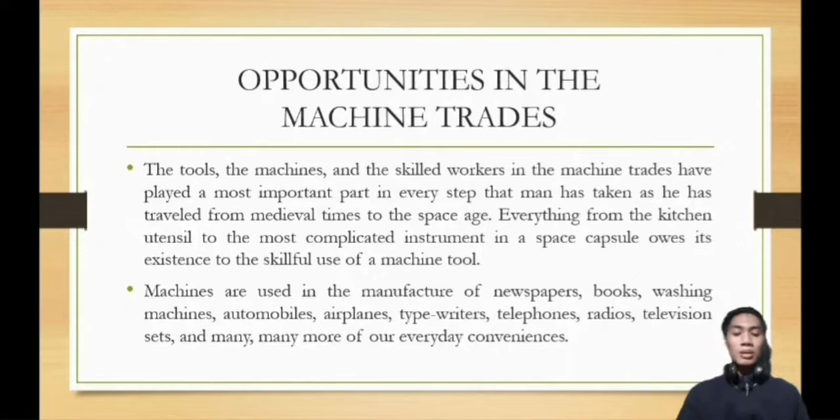Machines are used in the manufacture of newspapers, books, washing machines, automobiles, airplanes, typewriters, telephones, radios, television sets, and many more of our everyday conveniences.

Types of shops. A job shop is a machine shop that is equipped with machines and workers that can undertake a wide range of machining jobs of limited quantity and usually of a very specialized nature. A job shop may be called upon to develop the prototype of an idea thought up by a design engineer or an inventor. It may be employed to make a single piece or a dozen or 100 pieces in a standard or a special shape.

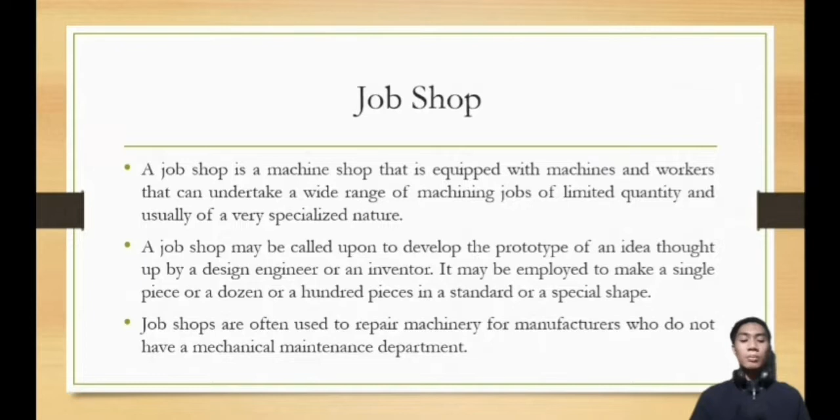Job shops are often used to repair machinery for manufacturers who do not have a mechanical maintenance department.

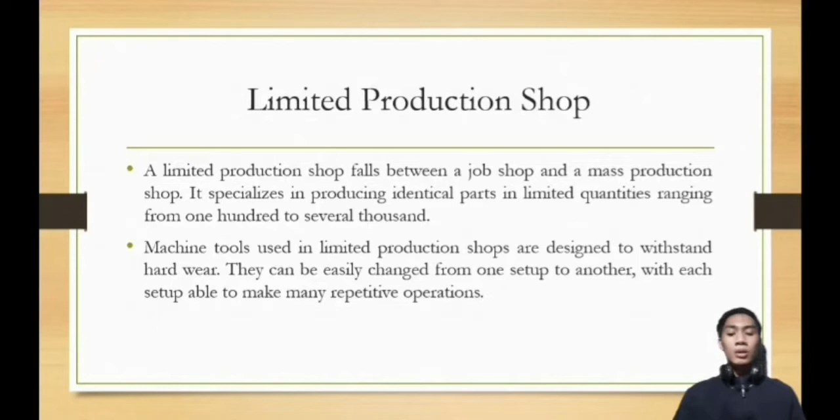Limited production shop. A limited production shop falls between a job shop and a mass production shop. It specializes in producing identical parts in limited quantities ranging from 100 to several thousand. Machine tools used in limited production shops are designed to withstand hard wear. They can be easily changed from one setup to another, with each setup able to make many repetitive operations.

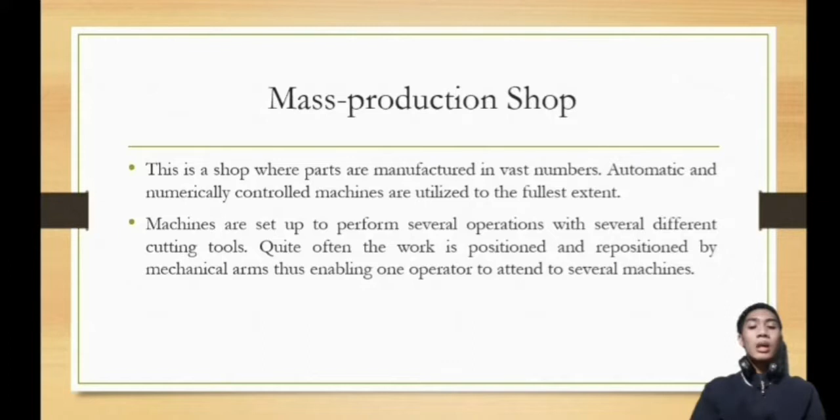Mass production shop. This is a shop where parts are manufactured in vast numbers. Automatic and numerically controlled machines are utilized to the fullest extent. Machines are set up to perform several operations with several different cutting tools. Quite often, the work is positioned and repositioned by mechanical arms, thus enabling one operator to attend to several machines.

Job description. The apprentice. Apprenticeship is a form of practical on-the-job training given under the direction of skilled mechanics or technicians. A person becomes an apprentice when he agrees to serve a prescribed length of time in order to learn the job or trade offered by an employer. An apprentice can specialize in any one of several specializations of the machinist trade.

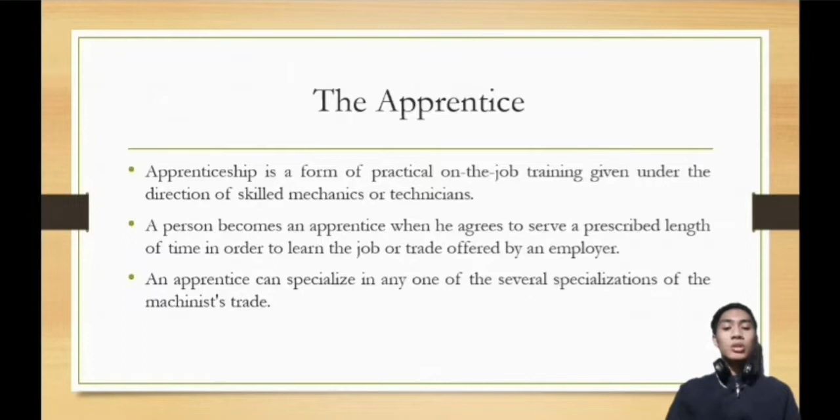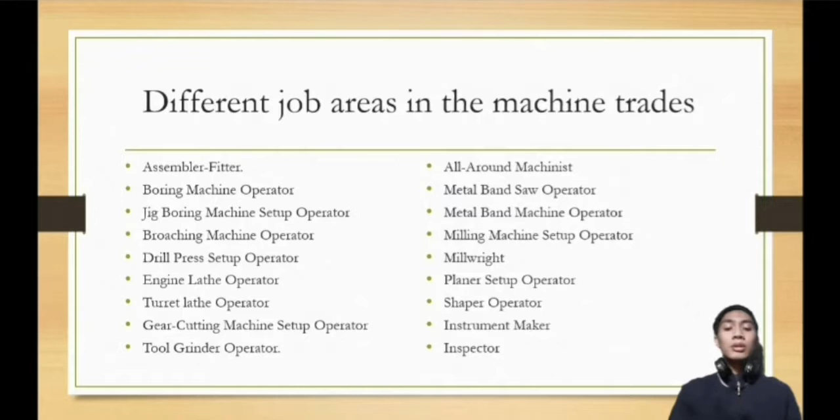Different job areas in the machine trades include: assembler-fitter, boring machine operator, jig boring machine setup operator, broaching machine operator, drill press setup operator, engine lathe operator, turret lathe operator, gear cutting machine setup operator, tool grinder operator, all-around machinist, metal band saw operator, milling machine setup operator, millwright, planer setup operator, shaper operator, instrument maker, and inspector.

Engineering positions.

Industrial engineering technician studies and records time, motion, methods, and speed involved in performance of maintenance, production, clerical, and other work operations to establish standard production rates and to improve efficiency. Prepares charts, graphs, and diagrams to illustrate workflow, routing, floor layouts, material handling, and machine utilization.

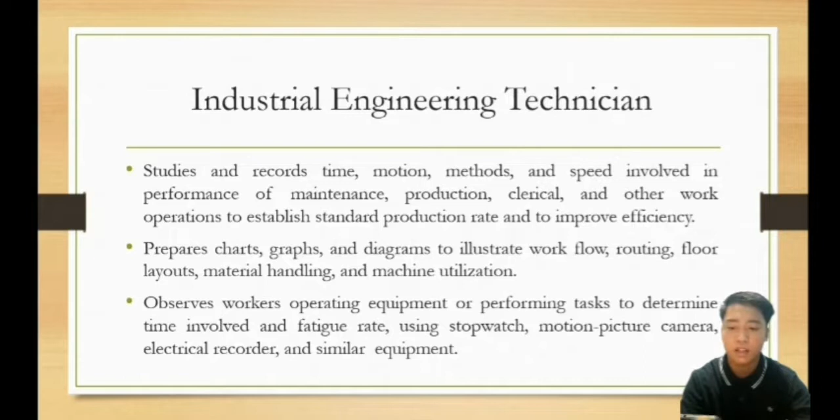Observes workers operating equipment or performing tasks to determine time involved and fatigue rate, using stopwatch, motion picture camera, electrical recorder, and similar equipment.

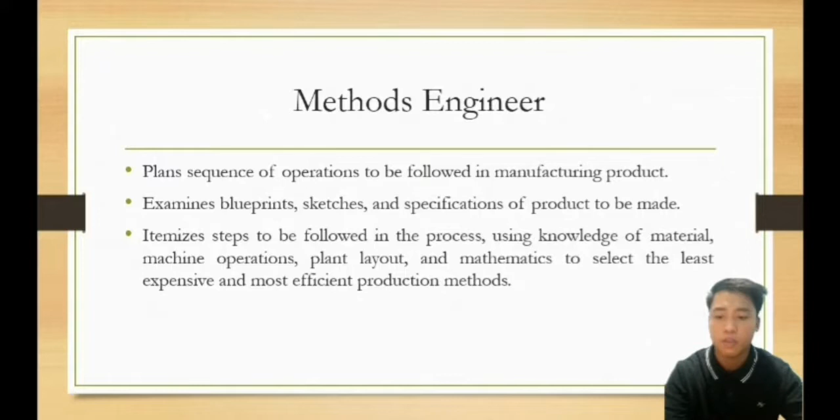Methods engineer. Plans sequence of operations to be followed in manufacturing a product. Examines blueprints, sketches, and specifications of products to be made. Itemizes steps to be followed in the process, using knowledge of material, machine operations, plant layout, and mathematics to select the least expensive and most efficient production methods.

Time study engineer. Develops work measurement procedures and directs time and motion studies to promote efficient and economical utilization of personnel and facilities. Analyzes work-study data and equipment specifications to establish time and production standards. Applies mathematical analysis to determine validity and reliability of sampling and work study statistics.

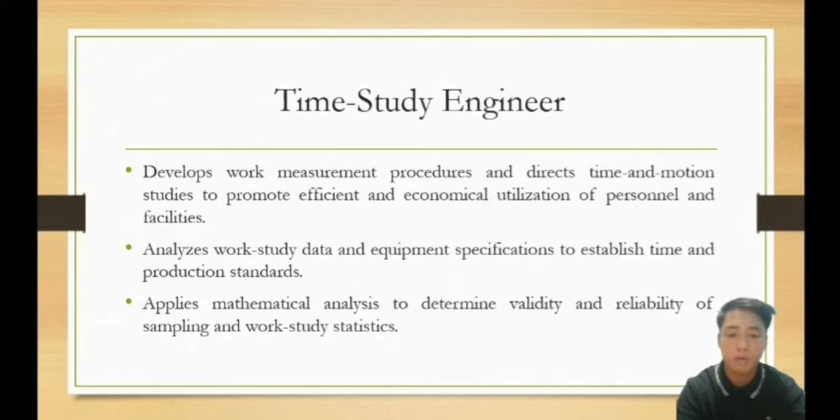Quality control engineer. Performs and oversees activities concerned with development, application, and maintenance of quality standards for processing materials into partially finished or finished products. Devises sampling procedures, designs forms for recording, evaluating, and reporting quality and reliability data, and writes instructions on use of forms. Establishes programs to evaluate precision and accuracy of production and processing equipment and testing, measurement, and analytical facilities.

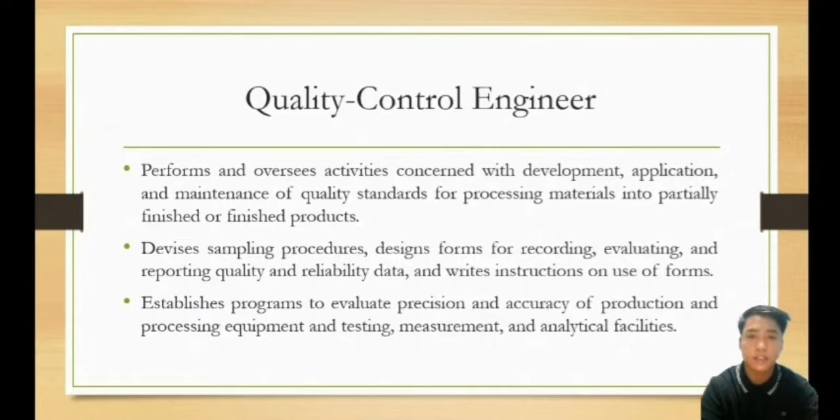Foreman. Supervises and coordinates activities of workers engaged in one or more occupations. Interprets specifications, blueprints, and job orders to workers and assigns duties. Analyzes and resolves work problems, or assists workers in resolving work problems.

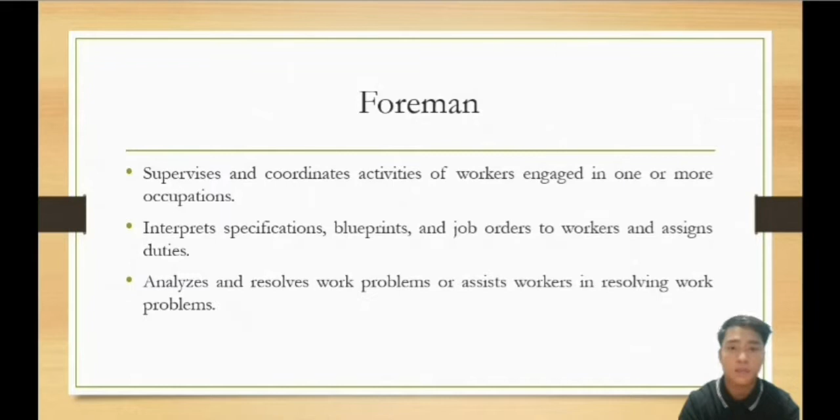Safety in the machine shop. In this topic, I'll show you how to prevent accidents and how to take care of the machines that you'll be using, what proper dress to wear, and what precautions to take for every machine. In general shop safety, the operator must remove his or her necktie, wristwatch, and jewelry.

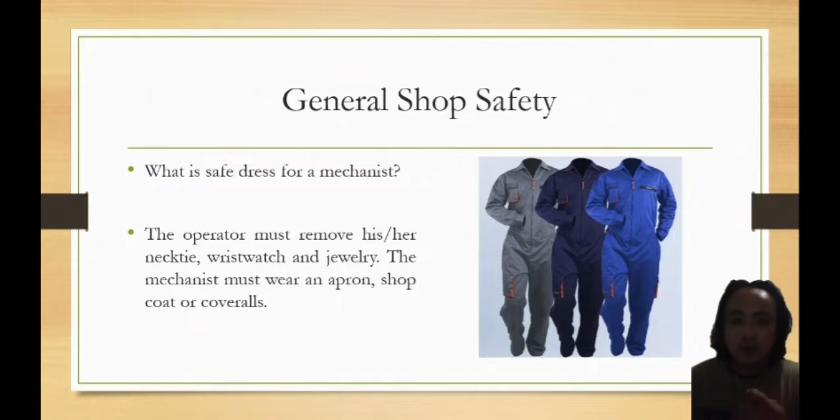The machinist must wear an apron, shop coat, or coveralls. When should gloves be worn in a machine shop, and why would goggles or safety glasses be worn by everybody working in the machine shop? Gloves should be worn when the worker is moving sheet metal or large pieces of stock, especially when stock edges are sharp or ragged, because gloves protect your hands from metal chips that cause wounds on the hands.

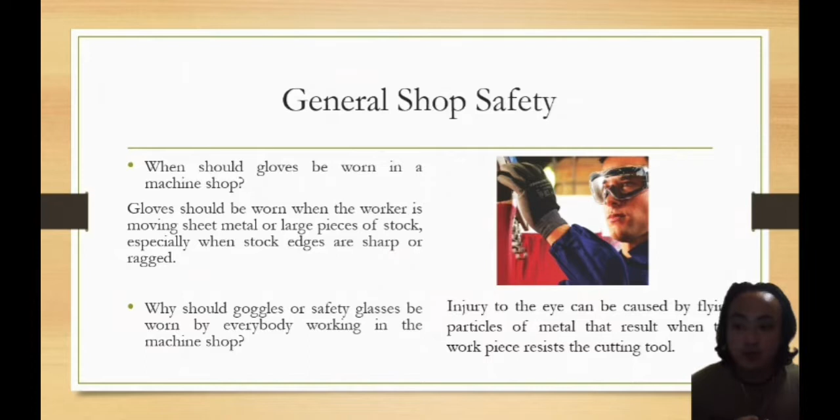Everybody must wear goggles or safety glasses because it prevents injury to the eye caused by flying particles of metal that result when the work piece resists the cutting tools.

What is the safe way to lift a heavy object? Don't attempt to lift a job or machine attachment by yourself if it is too heavy or too awkward for one person to handle. Before lifting, be sure that you have a firm footing. Keep your feet about 8 to 12 inches apart and get a good balance, then bend your hips and knees to squat down to your load. Keep it close to your body and straighten your legs to lift.

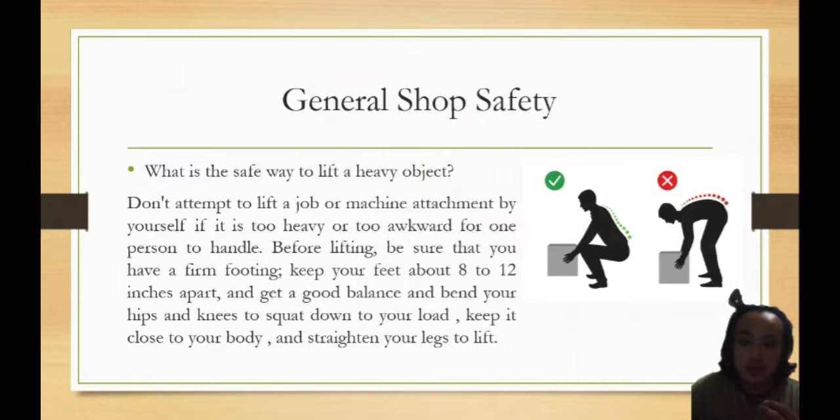What must be done before beginning repairs on a machine? Remove the fuse that controls the flow of electrical power to the motor of the machine.

Why is it dangerous to run a machine from which the guards have been removed? Guards removed to repair a machine or to enable the mechanist to make operative changes should be replaced before the power is turned on. Operating an unguarded machine is hazardous not only to the operator but also to other workers who may come in contact with moving gears and other machine parts.

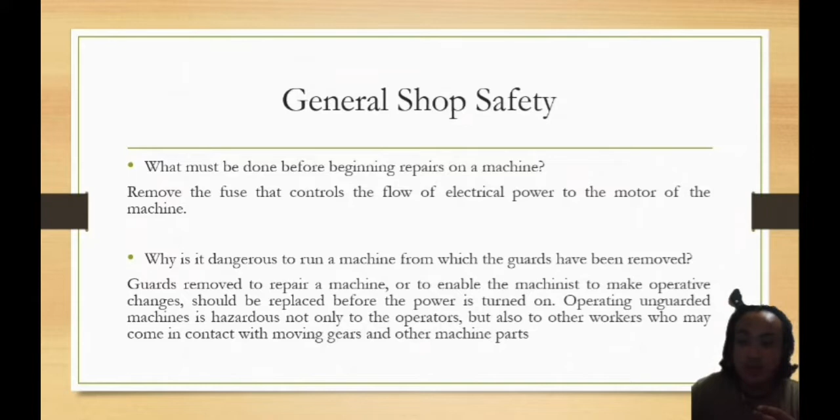Now let's proceed on safety on the bench. What causes the greatest number of accidents to bench workers? Most accidents to bench workers are caused by thoughtless use of tools, which includes using a tool incorrectly or carelessly. Many accidents result from using a tool to do something for which it was not intended.

For example, some people use a flat screwdriver as a chisel. Many painful accidents are caused by pointed or sharp-edged tools.

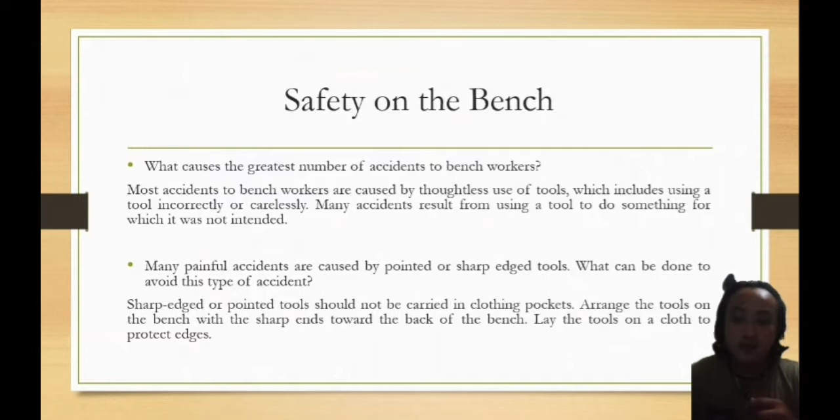What can be done to avoid this type of accident? Sharp-edged or pointed tools should not be carried in clothing pockets. Arrange the tools on the bench with the sharp ends toward the back of the bench. Lay the tools on a cloth to protect the edges.

Many workers are hurt because of the misuse of hammers. What rules, if followed, will remove the cause of these accidents? First, always check the fit of the handle in the hammer head. Make sure that the wedge is in place and tight.

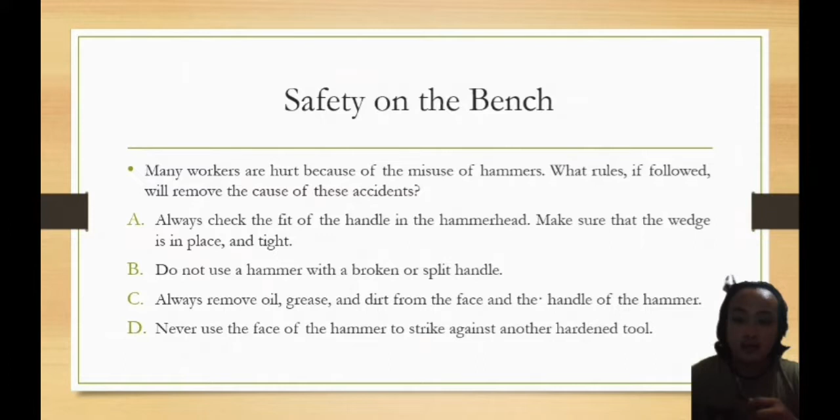Do not use a hammer with a broken or split handle. Always remove oil, grease, and dirt from the face and the handle of the hammer. Never use the face of the hammer to strike against another hardened tool.

Now let's proceed on hacksaw safety. Why is it unsafe to use a dull hacksaw blade? If a saw does not cut efficiently, it seems practical to apply more pressure to cut, increasing the chance that the blade will split with the great force behind it. Also, the more pressure with poor cutting action will cause the blade to break.

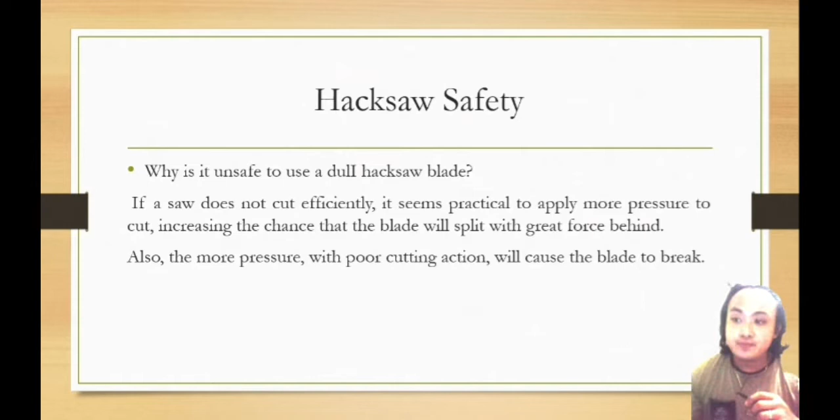What rules should be observed for the practice of safety when hacksawing? First, grip the work in the vise so that the saw cut will be near the jaws. Apply pressure only on the forward stroke. Start the saw cut with a light, even forward stroke, holding the saw frame at an angle. When the cut is established, bring the frame level and saw the full width of the job. Take the longest stroke possible, but do not permit the blade supporting pins to touch the job.

Lastly, use a blade having the proper number of teeth per inch to suit the job. Fine pitch for thin metal, coarse pitch for thick pieces.

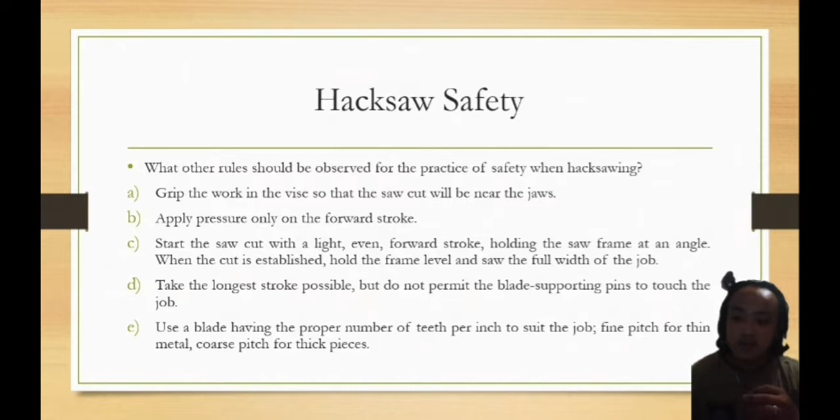Now let's proceed on drill press safety. The most common cause of accidents on a drill press is caused by the work not being securely fastened. The job must be securely held, clamped, or bolted down, whatever size hole is being drilled.

How should work be held for drilling? Work should be held in a vise or clamped to the table.

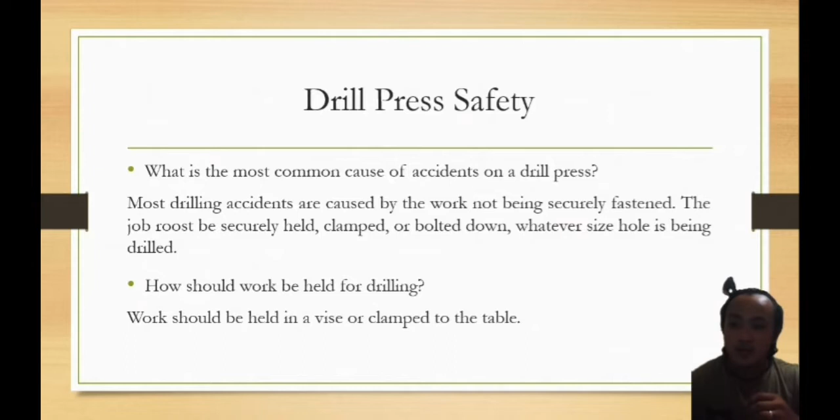Why should the drill press operator keep his hair cut short or wear a cap? To prevent stray strands of hair from being caught in the fast-moving belts or the revolving drill spindle.

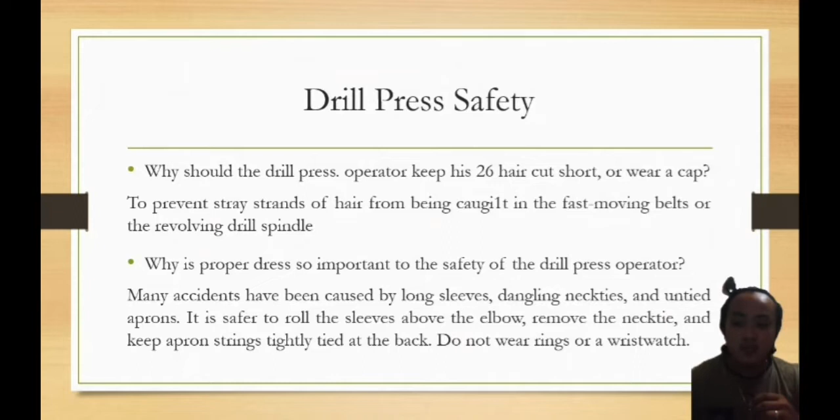Why is proper dress so important to the safety of the drill press operator? Many accidents have been caused by long sleeves, dangling neckties, and untied aprons. It is safer to roll the sleeves above the elbow, remove the necktie, and keep apron strings tightly tied at the back. Do not wear rings or a wristwatch.

What are the most important rules for safe operation of the drill press? First, think about what you are doing, keep your mind on the job. Second, dress safely: remove rings, watches, identification bracelet, and neckties, and roll up your sleeves. Then fasten the job or vise securely to the table.

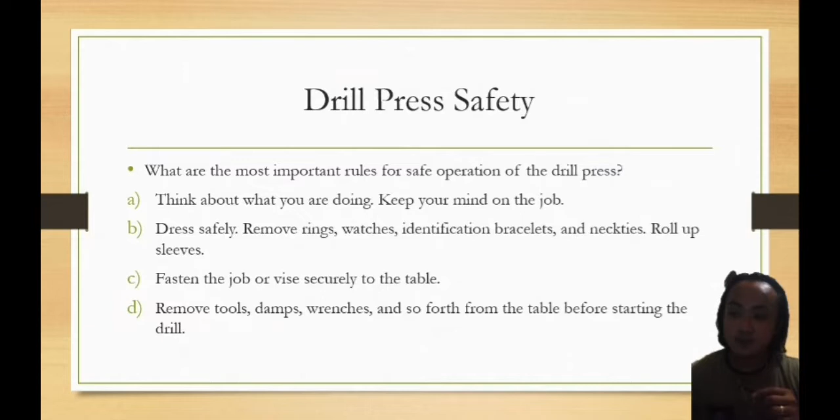Remove tools, clamps, wrenches, and so forth from the table before starting the drill. Remove the drill drift from the spindle or the chuck key from the drill chuck immediately after use. When the drill becomes dull, resharpen it or replace it, then grind the drill correctly for the metal it is required to cut. As the drill breaks through the work, relieve down feed pressure, then stop the machine before measuring or adjusting the job.

Lastly, stop the machine before using a brush to remove chips and excess coolant.

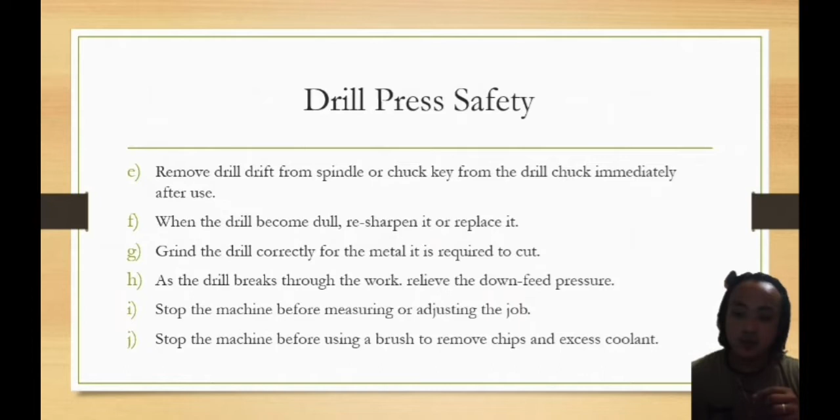Next is safety on the lathe.

Why should the lathe be stopped before making adjustments to the tool holder? When the tool post screw is loosened, the wrench may swing into the revolving chuck jaw. The sharp blow would break the tool post screw, causing it to fly and endangering the operator and nearby workers.

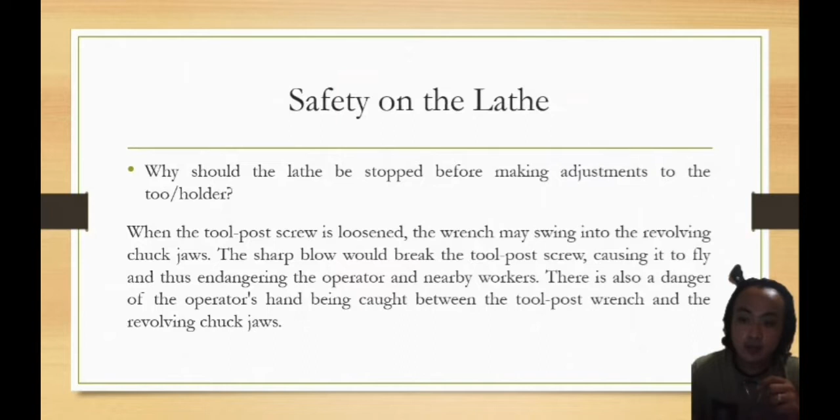How can wearing jewelry create a safety hazard for the lathe operator? Loose-fitting jewelry, such as an identification bracelet, or an article raised above the skin surface, such as a ring, can easily be caught on a revolving machine part, which would drag a hand or arm into the moving machinery, causing serious injury.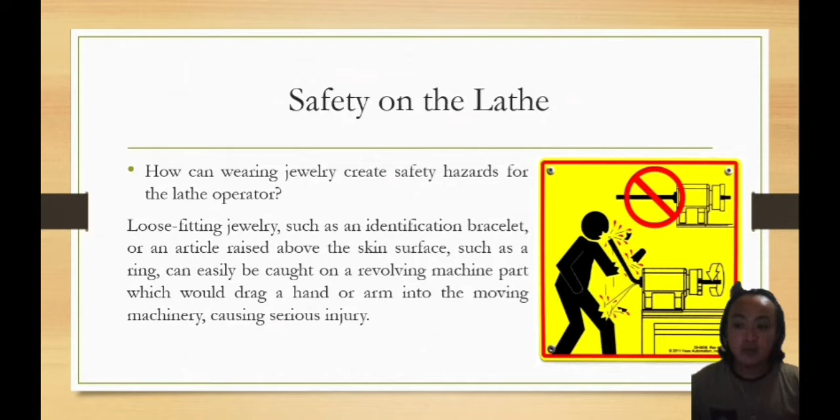Here are some safety precautions on using the lathe machine. Do not operate the lathe until you understand the controls. Never operate the machine if safety guards are removed.

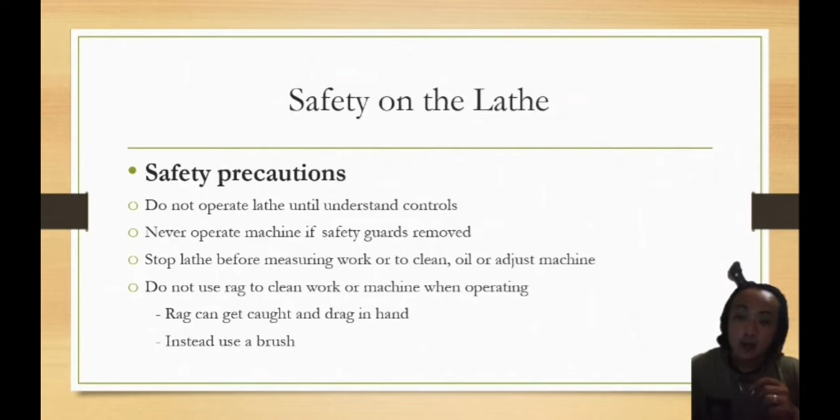Stop the lathe before measuring work, or to clean, oil, or adjust the machine. Do not use a rag to clean work or the machine when operating, because the rag can get caught and drag in the hand.

Instead, use a brush. Now let's proceed to milling safety. How should milling cutters be handled? Milling cutters have sharp cutting edges and should be handled carefully. They should be held in a piece of cloth to prevent injury to the operator and to the cutting edges.

Is there a safe side and an unsafe side of the milling machine when the cutter is revolving? The milling machine operator should not stand on the side that the cutter is entering the work.

The revolving cutter can drag a brush or anything else that gets near enough into the work. The operator should always stand on the going-away side of the cutter.

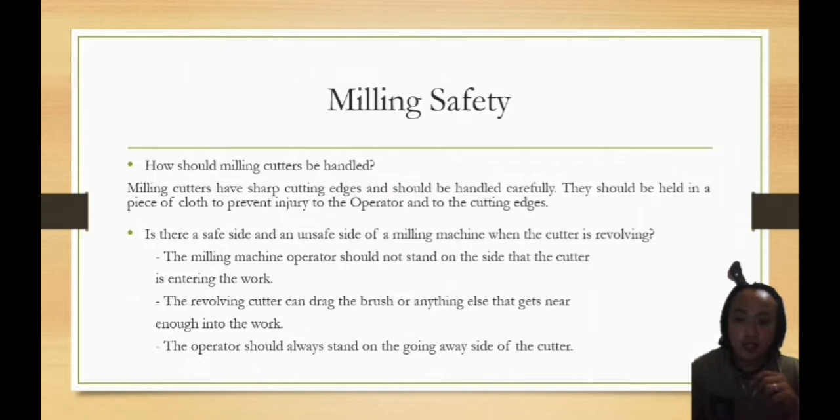What rules, if followed, will assure the safe operation of a milling machine? First, be sure that you are aware of the function of every operating control.

Don't push a button, move a handle, or engage a clutch unless you are sure of the machine action which will occur when you do so.

Be sure that everything is secure before turning on the power. Check the cutter, the bolts holding a vise or any attachment, and check the job in the vise or chuck for tightness.

Check the safe clearance of the job, cutter, arbor, overarm bracket, vise, or index head before turning on the power. Check the setting of speed and feed before turning on the power.

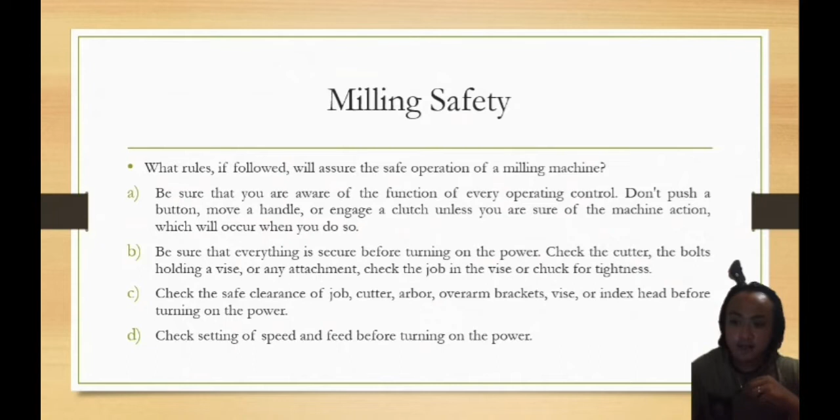Do not lean on the machine. Stand upright. Keep your head out of the direct line of the cutter. Stay on the going-away side of the cutter. Remove chips with a brush.

Keep cotton waste and rags away from any part of a milling machine while it is in operation. Stop the machine before measuring the job, feeling the surface of the finished cut, tightening a bolt, changing the speed, or reversing the feed. Next is shaper safety.

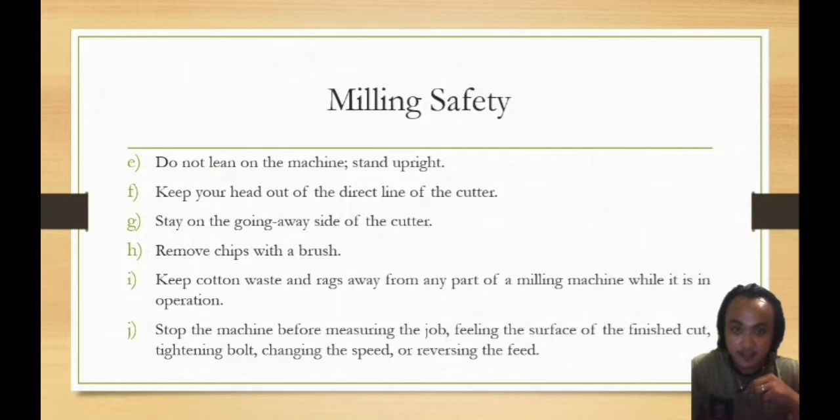Here are some safety precautions for using the shaper machine. First, wear approved goggles or a face shield. Select the proper tool for the job. Be sure that the tool head, table, and table support are secure before starting the machine.

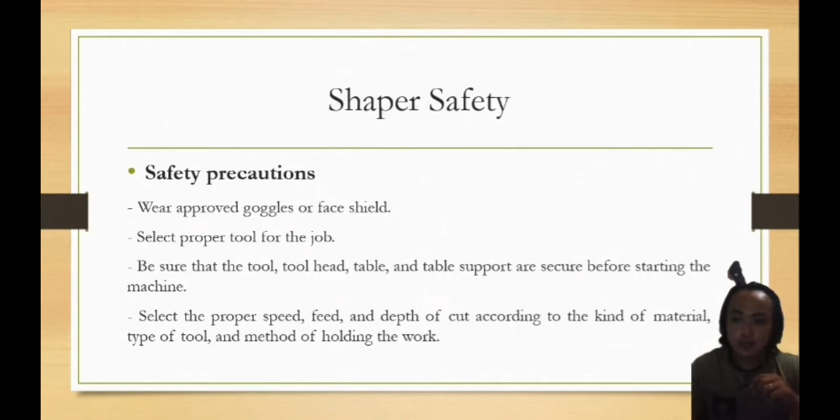Select the proper speed, feed, and depth of cut according to the kind of material, type of tool, and method of holding the work. Stand parallel to the direction of the stroke of the machine when it is operating, and never reach across the table between strokes.

Do not touch the tool, clapper box while the machine is running. Make adjustments on the work setup only when the machine is stopped. Turn off the machine before leaving it.

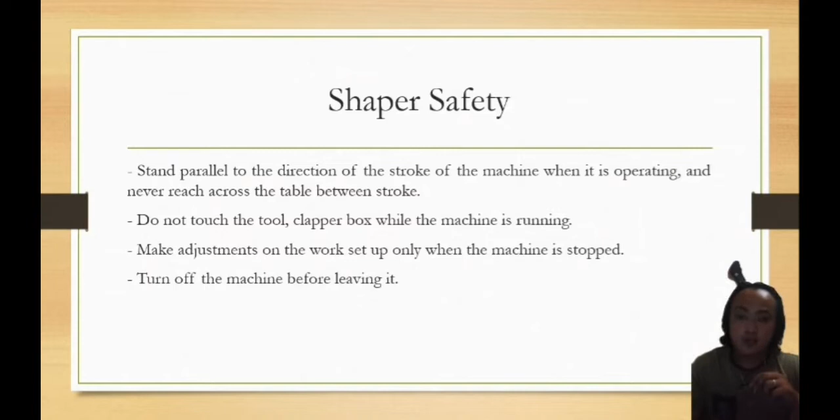Lastly is safety on the grinding machine. Here are some of the safety precautions for using a grinding machine.

First, only a trained person can use the grinder. Always wear safety goggles and a face shield during operation. Wear close-fitting gloves and a coat or heavy shirt for protection.

Always change a damaged disc. Never remove the guard, and do not use a damaged grinding machine.

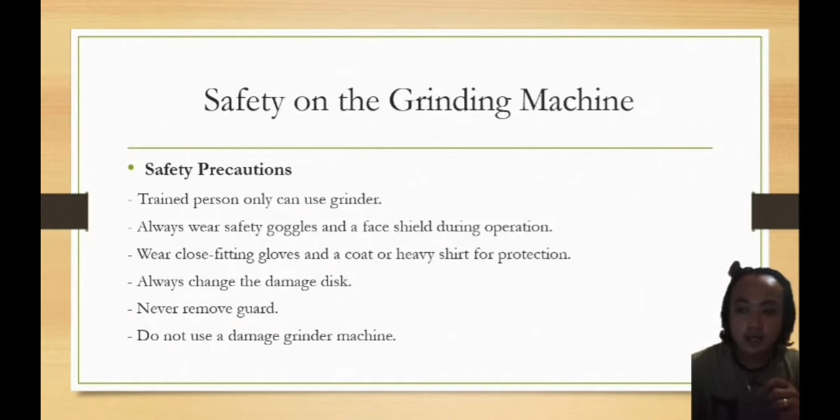Hand tools for bench work. Hammers. Hammers were one of man's earliest tools. The types of hammers used by machinists are limited, but they are available in many sizes.

Machinist hammers are classified as hard or soft hammers. What are hard and soft hammers? A hard hammer is one that is made of carbon steel and forged to shape and size. It is heat-treated to make the striking faces hard.

A soft hammer may have the entire head made of a soft metal, such as lead, babbitt, copper, or brass. Soft-face hammers have only their striking surface made of plastic, rubber, or rawhide.

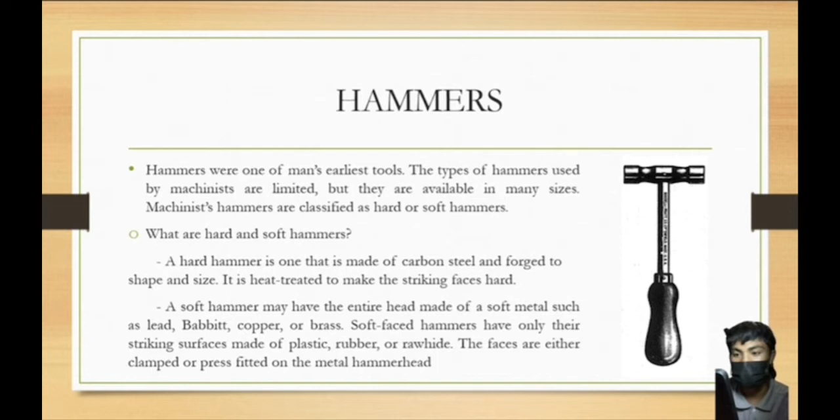The faces are either clamped or press-fitted onto the metal hammer head. Here are some uses of a hard hammer. A hard hammer is used for striking punches, chisels, steel letters, and figures. It is also used for forging hot metal, riveting, bending, straightening, peening, stretching, and swaging.

What are some uses of soft hammers? Soft hammers are used when striking finished or semi-finished workpieces to prevent marring the finished surface.

For example, soft hammers are commonly used for seating a workpiece in a machine vise, or tapping finished work being set up for a machining or layout operation.

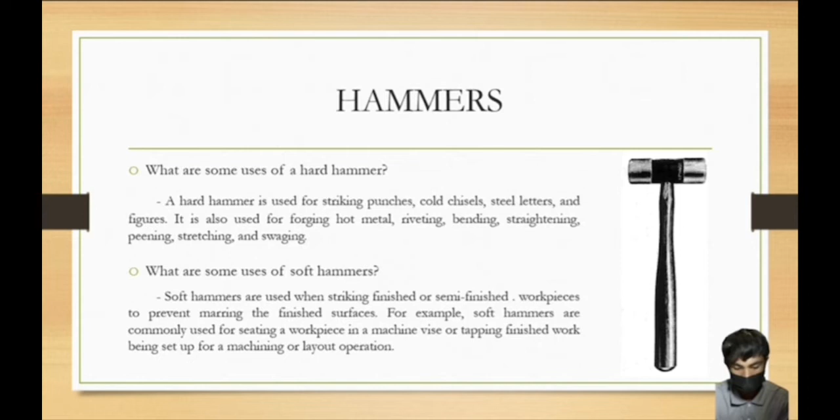Describe the hard hammers most commonly used by machinists and identify their parts. Indicate an important use of each hammer.

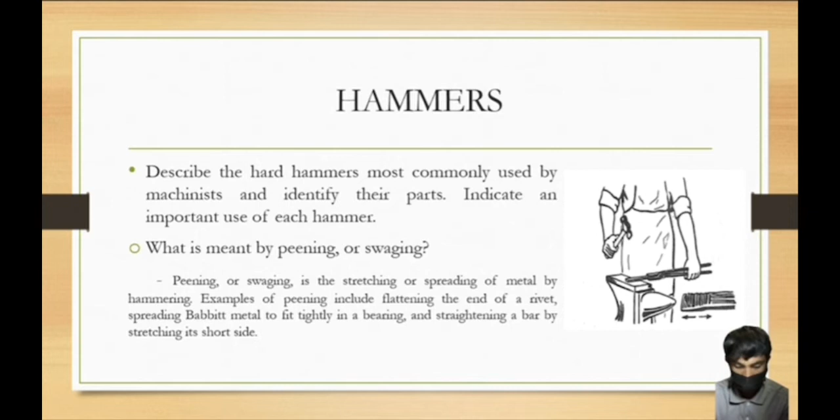What is meant by peening, or swaging? Swaging is the stretching or spreading of metal by hammering. Examples of swaging include flattening the end of a rivet, spreading babbitt metal to fit tightly in a bearing, and straightening a bar by stretching its short side.

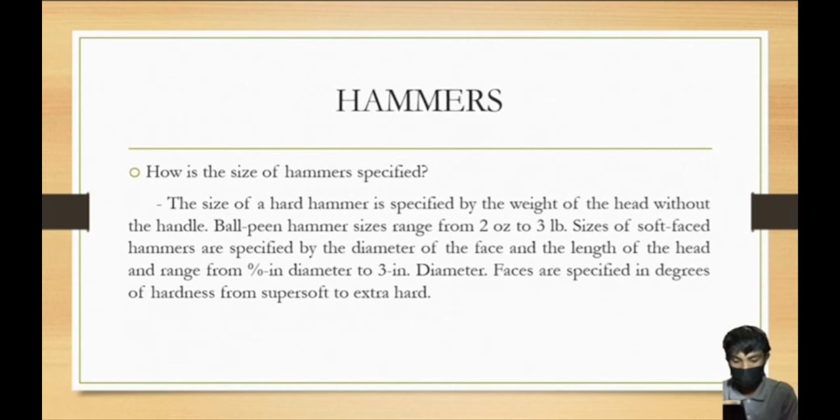How is the size of hammers specified? The size of a hard hammer is specified by the weight of the head without the handle. Ball peen hammers range from 2 oz to 3 lb size.

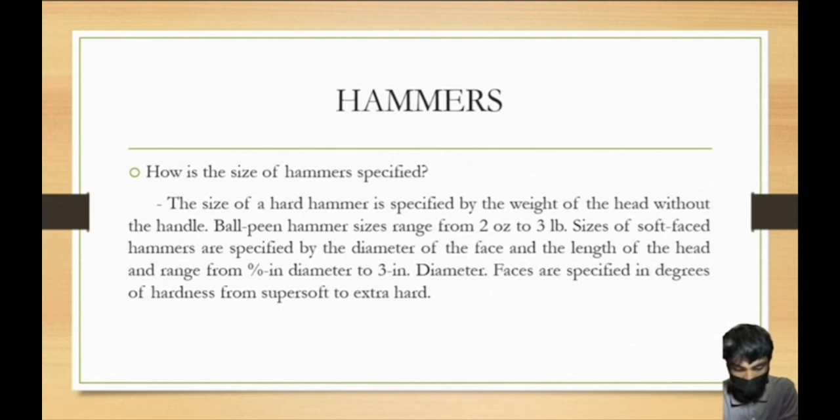What is a hand punch? A hand punch is a tool held by hand against a workpiece. The end in contact with the workpiece is shaped for a particular job, whereas the other end is struck with a hammer.

Name the different types of punches commonly used by the machinist. The punches used most often by the machinist are the drift punch, pin punch, prick punch, center punch, and automatic center punch. What is a drift punch?

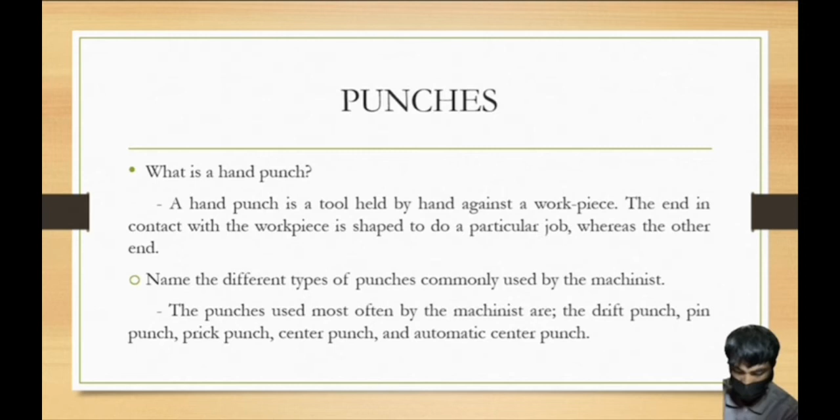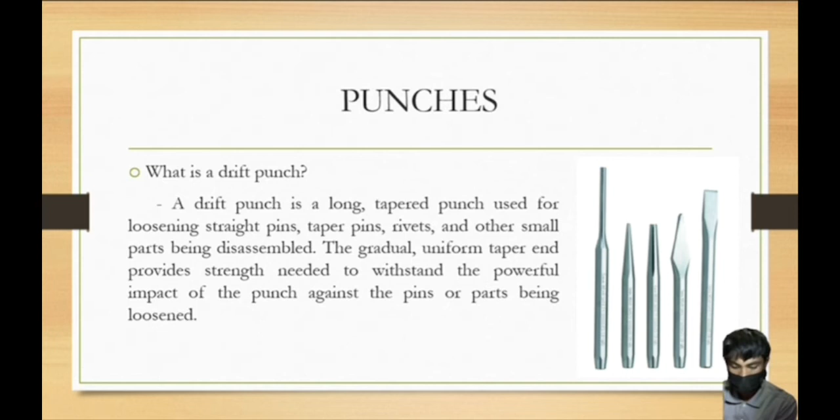A drift punch is a long tapered punch used for loosening straight pins, taper pins, rivets, and other small parts being disassembled. It has a gradual uniform taper that provides the strength needed to withstand the powerful impact of the punch against the pins or parts being loosened.

How should a drift punch be used? The diameter at the small end should be slightly smaller than the diameter of the part to be knocked loose. The punch end should be located squarely on the part and held firmly against it. The head of the punch should be struck squarely using a quick, sharp blow with a hard hammer. Once the part has been loosened, the drift punch should not be used further because the tapered end will become wedged in the hole. A drive pin punch should be used to drive the pin out of the hole.

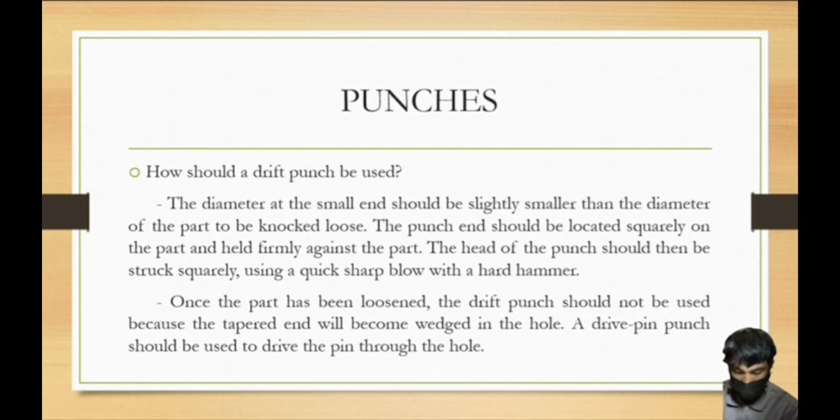What are drive pin punches and how should they be used? Drive pin punches are used to set in place or remove straight and taper pins and some types of small parts requiring a drive fit. The diameter of the punch ends are made slightly smaller than the nominal size so that the punch will not bind in the hole.

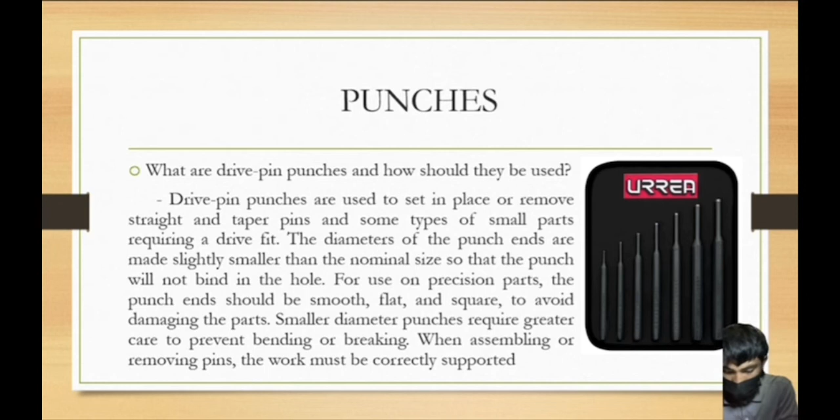For precision parts, the punch ends should be smooth, flat, and square to avoid damaging the parts. Smaller diameter punches require greater care to prevent bending or breaking. When assembling or removing pins, the work must be correctly supported.

What is a prick punch? A prick punch is made of hardened tool steel and ground to a slender point having a 30° to 60° included angle. It is used to mark lightly or indent the intersection of layout lines.

What is a center punch? A center punch is similar to a prick punch in appearance except for the point, which is ground to a 90° included angle.

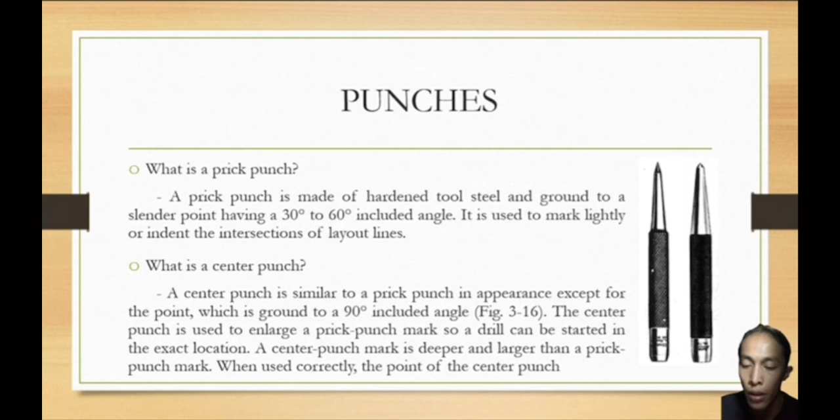What is an automatic center punch? The automatic center punch makes punch marks of a uniform size without the use of a hammer.

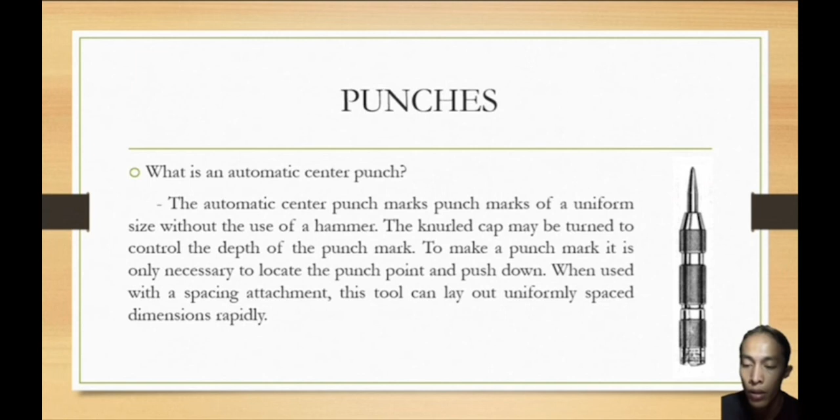What is a screwdriver? A screwdriver is a hand tool that is designed to turn screws.

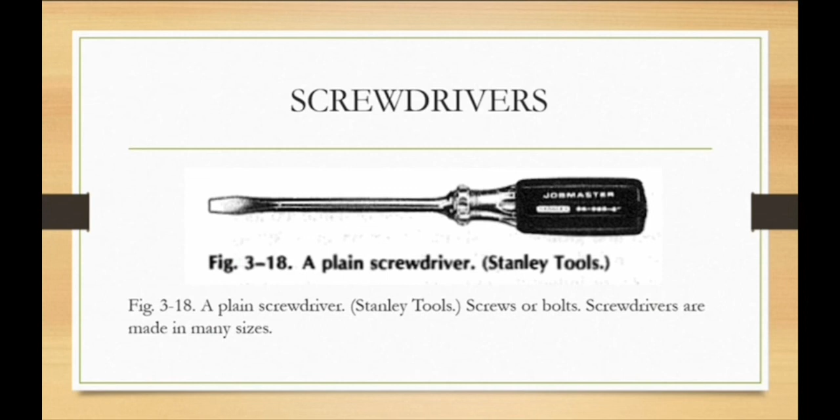What is a heavy-duty screwdriver? A heavy-duty screwdriver is of average length but is made with a heavy blade and a square shank.

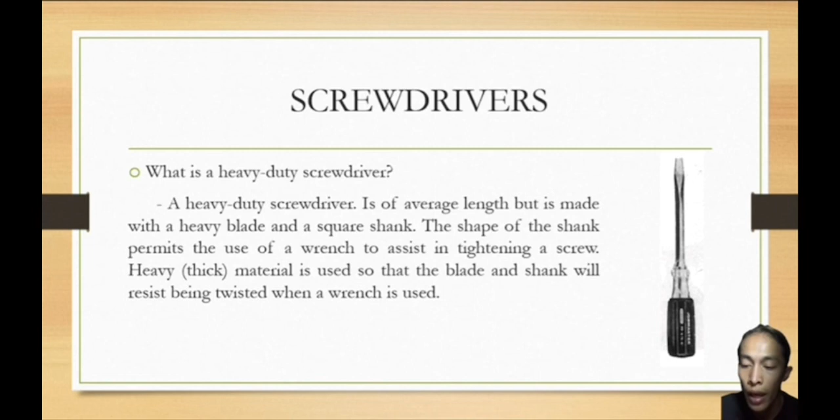What is a Phillips screwdriver? A Phillips screwdriver is specially designed to fit the heads of Phillips screws.

What is the purpose of a double-ended offset screwdriver? A double-ended offset screwdriver is used for turning screws in awkward places where there is not enough room to use a regular screwdriver.

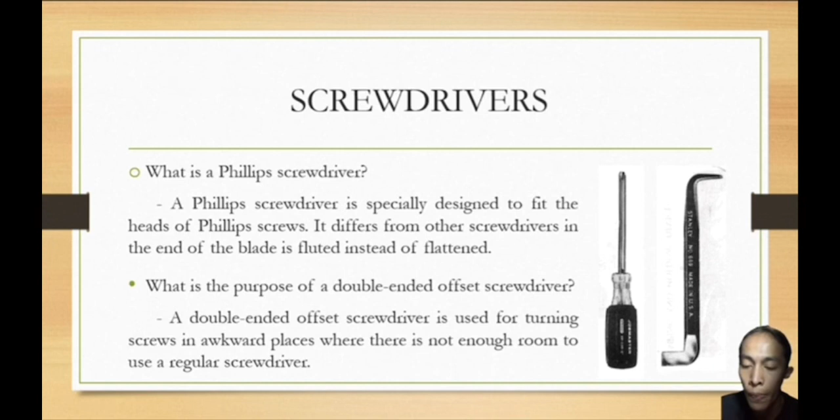How should the blade of a worn screwdriver be ground? A screwdriver blade should be ground so that the faces will be almost parallel with the sides of the screw slot, and the end of the blade should be made as thick as the slot in the screw will permit.

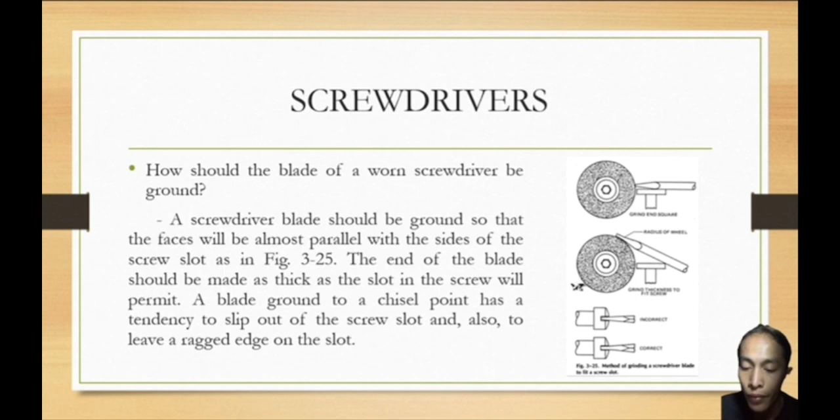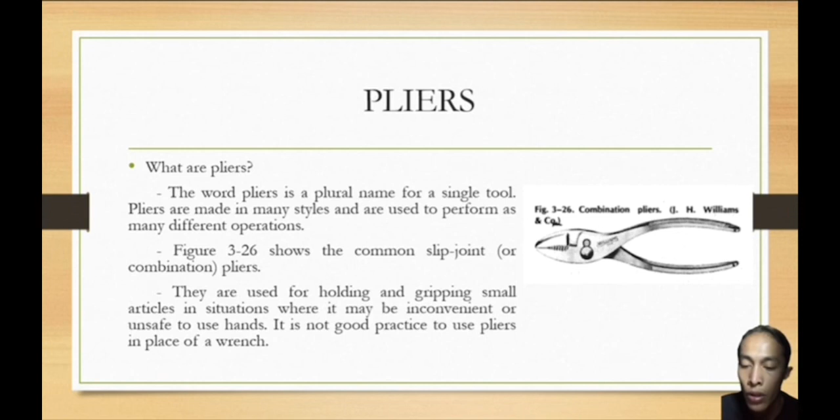What are long-nose pliers? Long-nose pliers are made, as the name implies, with a long tapering nose or jaws. What are diagonals? Diagonals are a special type of pliers used exclusively for cutting and stripping electrical wire.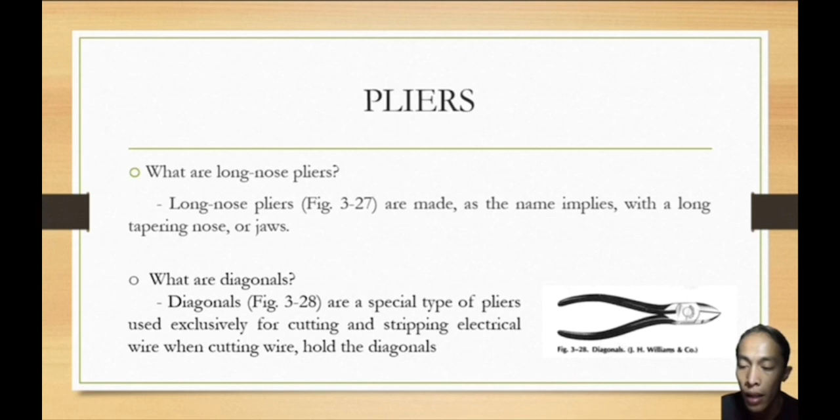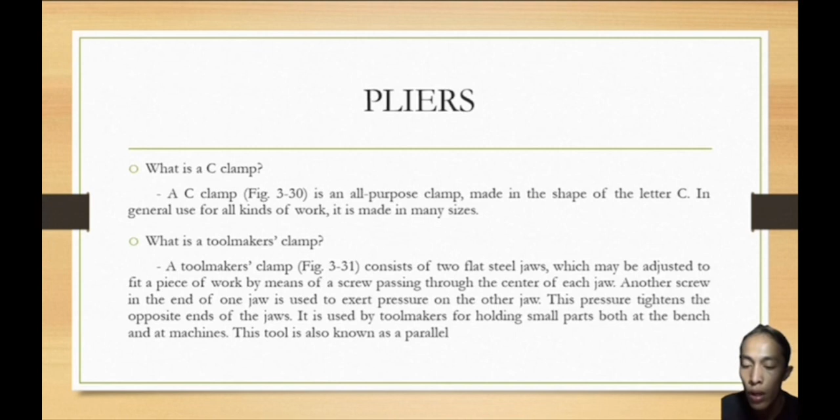What is a toolmaker's clamp? A toolmaker's clamp consists of two flat steel jaws which may be adjusted to fit a piece of work by means of a screw passing through the center of each jaw. Another screw in the end of one jaw is used to exert pressure on the other jaw.